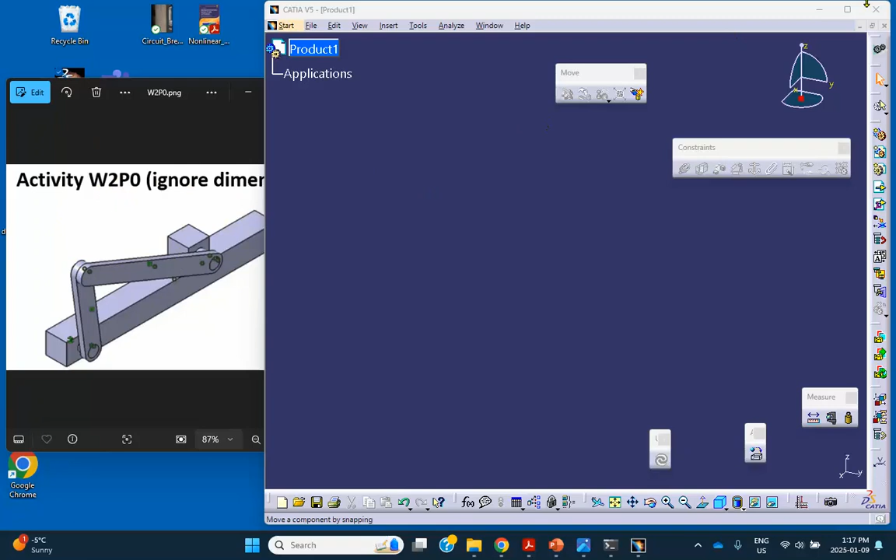I'm not going to show this thing again. Let's go back here and start making it. Now, immediately I save this thing: file, save management, save as - desktop, 2025, week 2, activities, activity W2P0. So everything is gonna go in there for this particular problem.

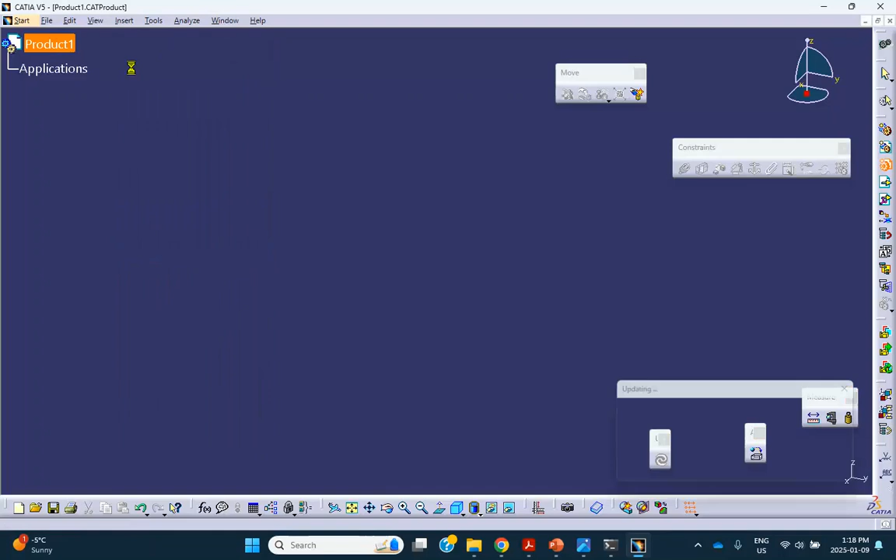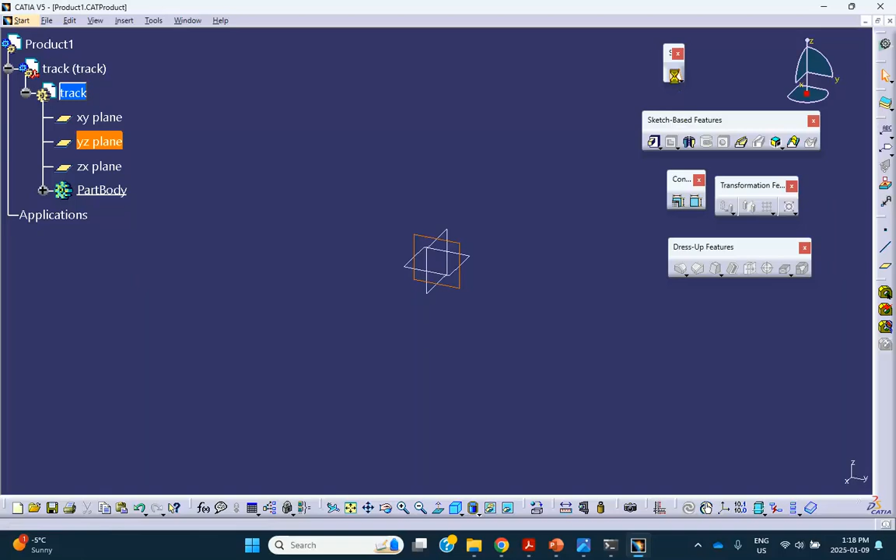Now let me do the track first. Insert new part, and I'm gonna call this thing track. Let's go make it - it's just a box basically. On that plane, I will sketch. Since dimensions are ignored, I might as well draw anything that I want, like this. Exit, and then pad it until I'm happy.

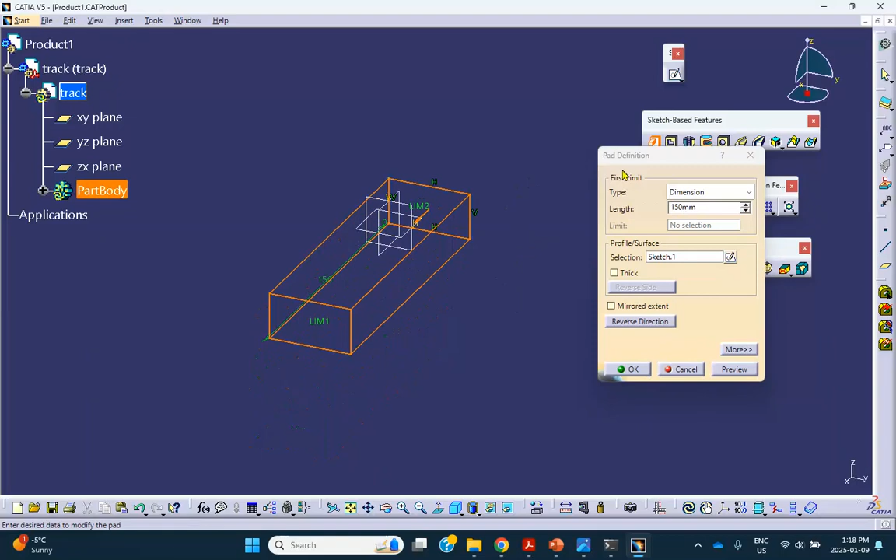Let me make this thing 150. See how it looks like. Maybe longer, 300. Preview. Yeah, sure, let me make it a little bit longer - 350.

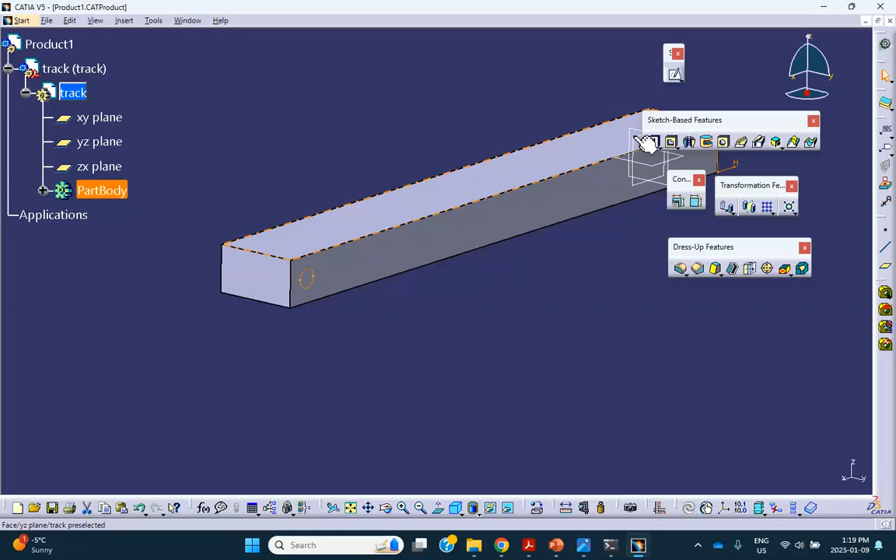There's the track, except that at this corner point I'm going to make a pin sticking out. On that plane I will sketch in a circle - this is where the pin of the connecting rod of the crank is going to go. Exit and then pad it, maybe 15. Yeah, that's good, I made it 15. Now I'll go all the way to the top.

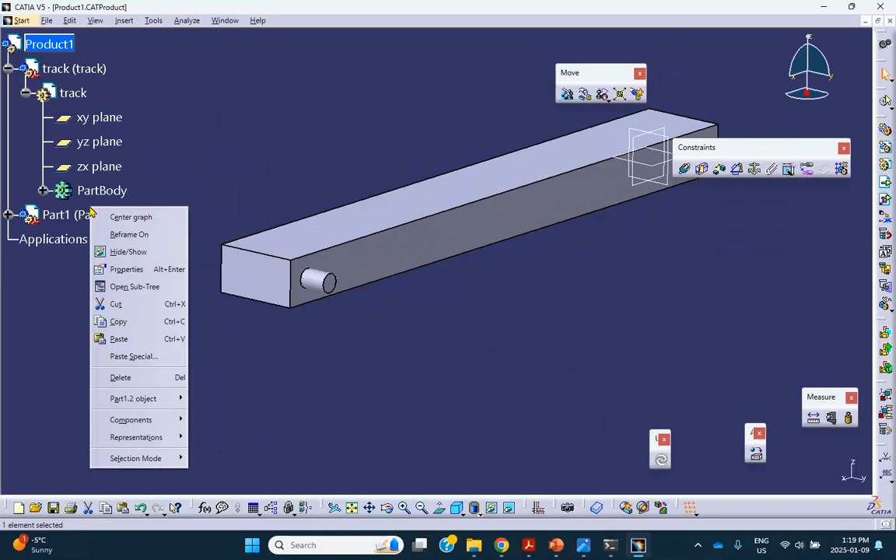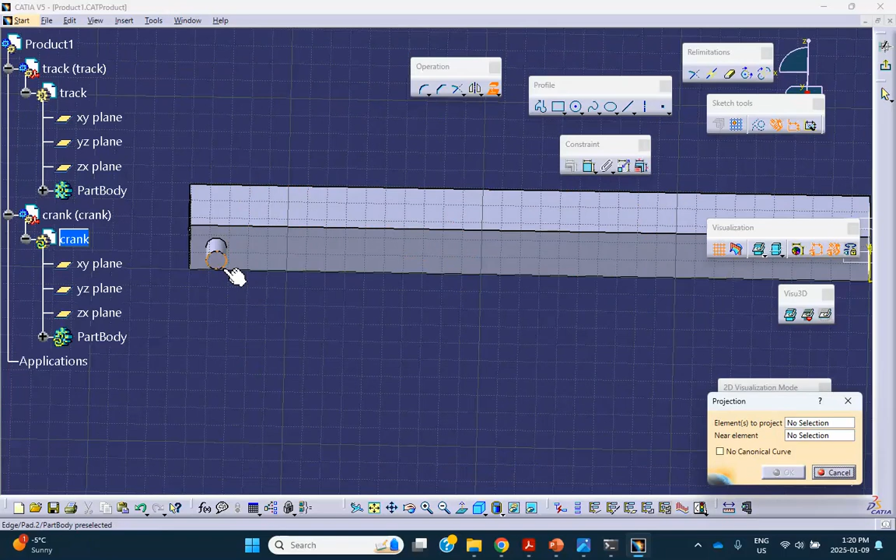Let's do the crank. Insert a new part - I'll say no, I'll make this thing crank. Let's make it. On that plane I will sketch - why don't I project that circle? There, it's projected, and here's the normal view.

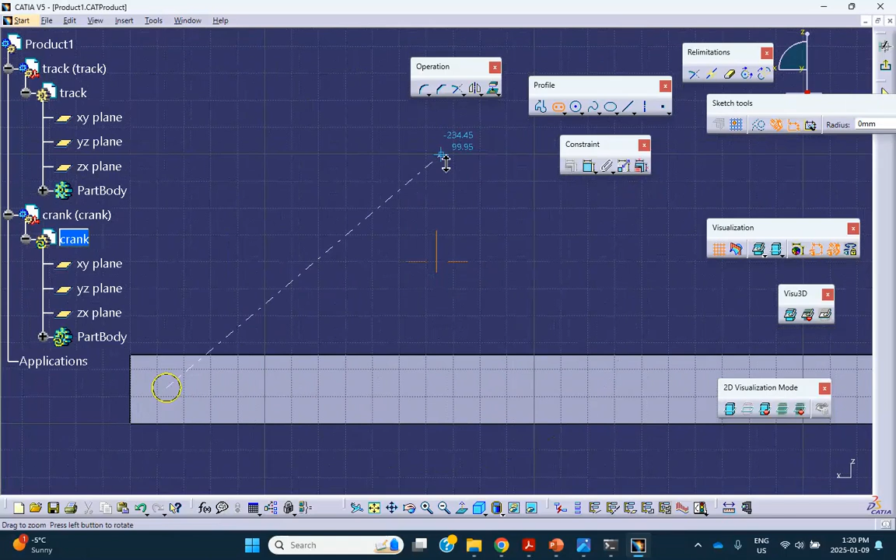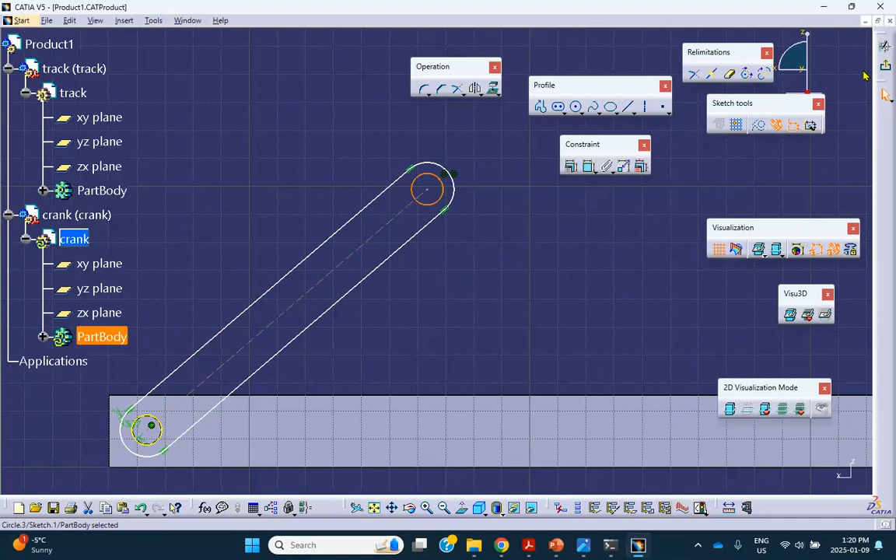Let's do an elongated hole. I like this because it makes my job really easy. Let me see, yeah, that's going to be my shaft. Okay, let's make another hole at this other end - circle at this end. Exit, and we can pad it. I'll make this thing 10. Yeah, good - so this is going to be the crank basically, all the way to the top.

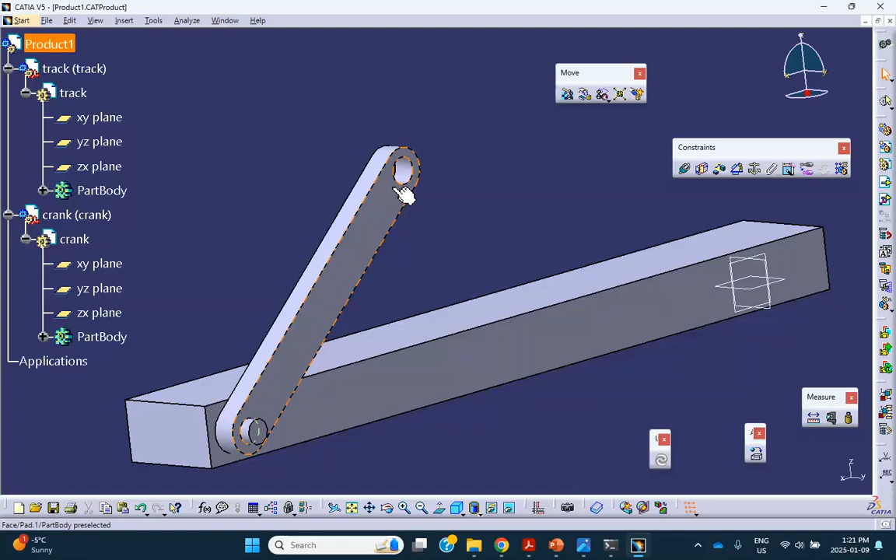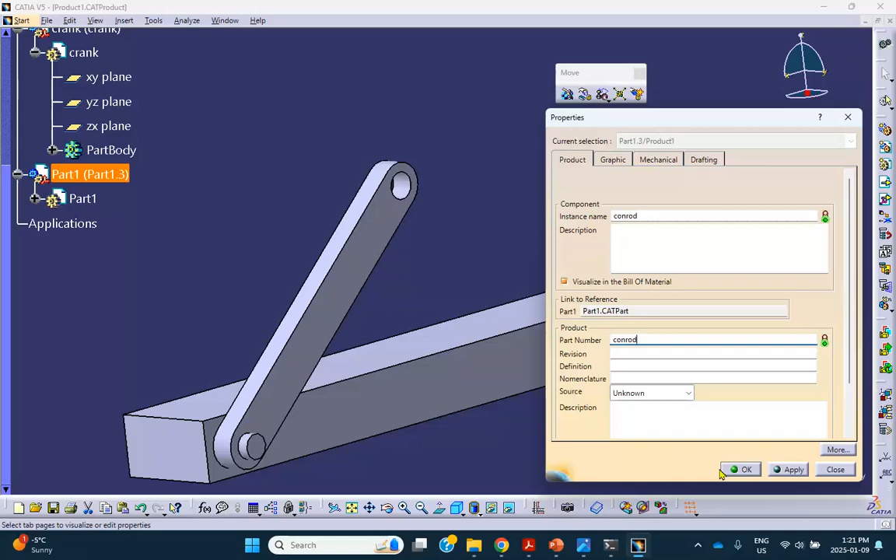Let's do the connecting rod. Insert new part - call it conrod. Let's go make it. On that plane I will sketch - why don't I project that circle?

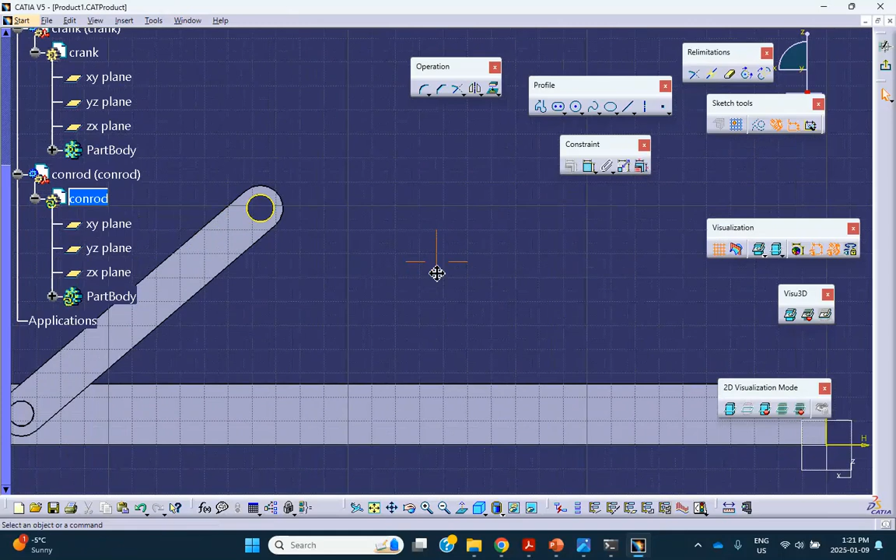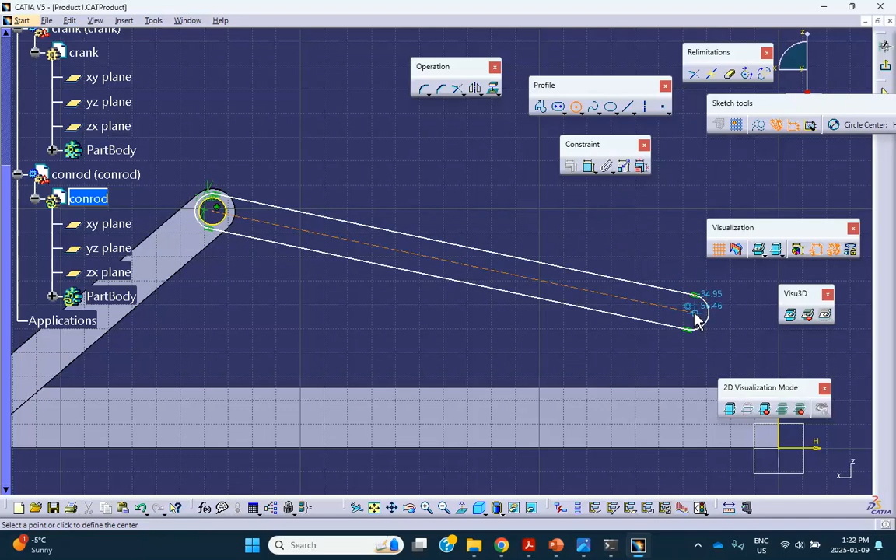Then I do the rest of the connecting rod. Once again I like this elongated hole, I put it there - this is going to be our connecting rod. Let me also make a circle at this end. Exit. If I pad it, there's going to be a hole here and a hole there.

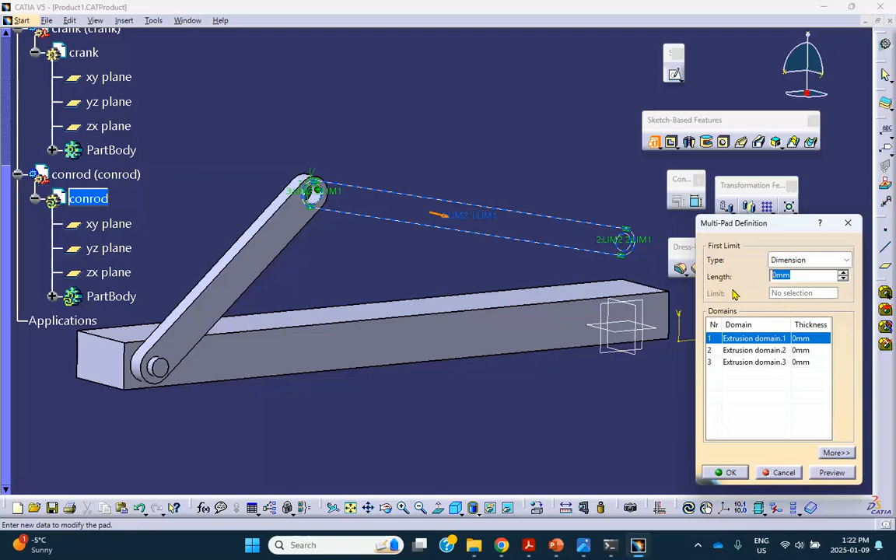Now I don't want a hole there - I want a pin sticking out. And here, no problem, a hole. That being the case, I'm going to do a multi-pad instead. So the first curve is the actual conrod, the periphery of the conrod. I'll make that thing 8 - see how it looks like? Maybe 6.

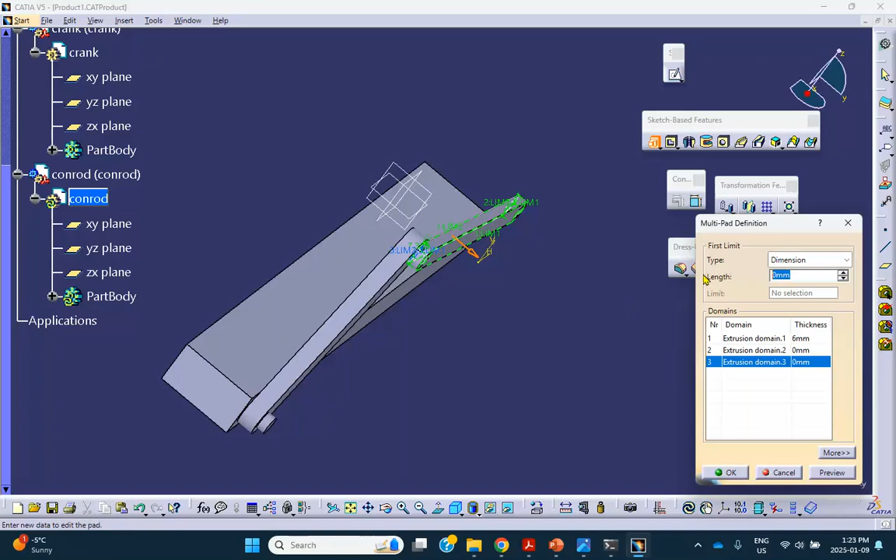Looks like that, are we happy? Sure, why not. This one is the thing on the other end that I want to be a hole, which is fine, and that is this end. I want maybe, I don't know, I'll make it - this was 15 and this was 8, so let's make it 6, let's make it 11. We can fix this thing later on if needed. What happened? I think I canceled it - let's try it again.

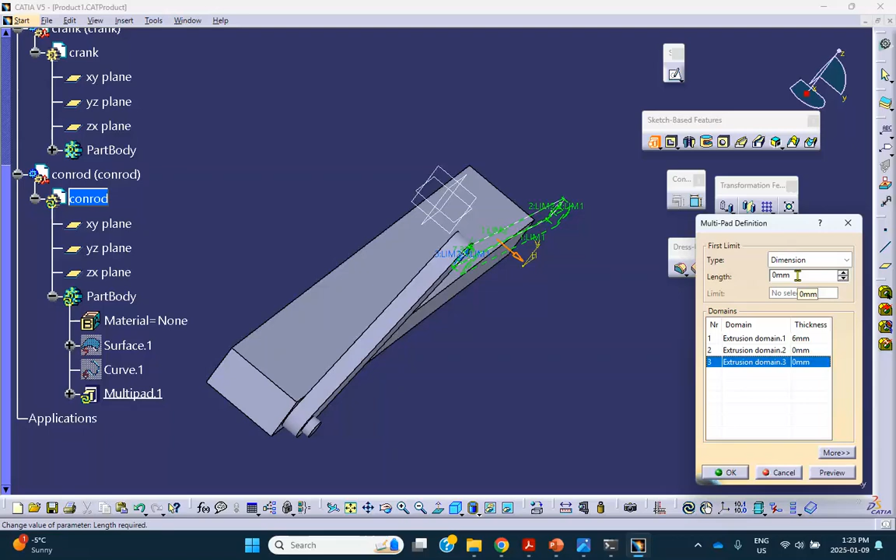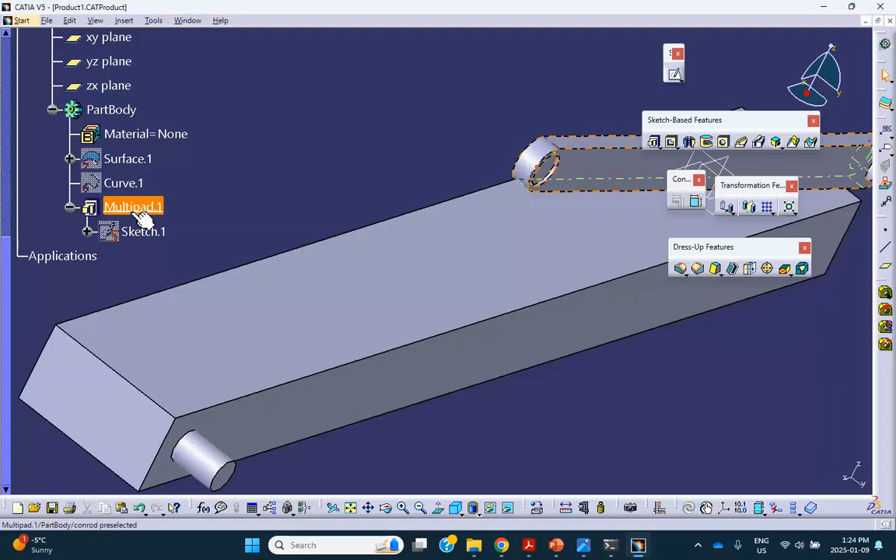Multipad - this, I made this thing 6, and I think I made this thing 5. Okay, there. Let me hide that to see what's going on. So that should not have been 6, should have been bigger than that - this was 6, right? So this one should have been 11 maybe. Yeah, that's better. Now the other fellow is in hiding - where's the other fellow? In hidden mode, right there. Let's bring it in the front.

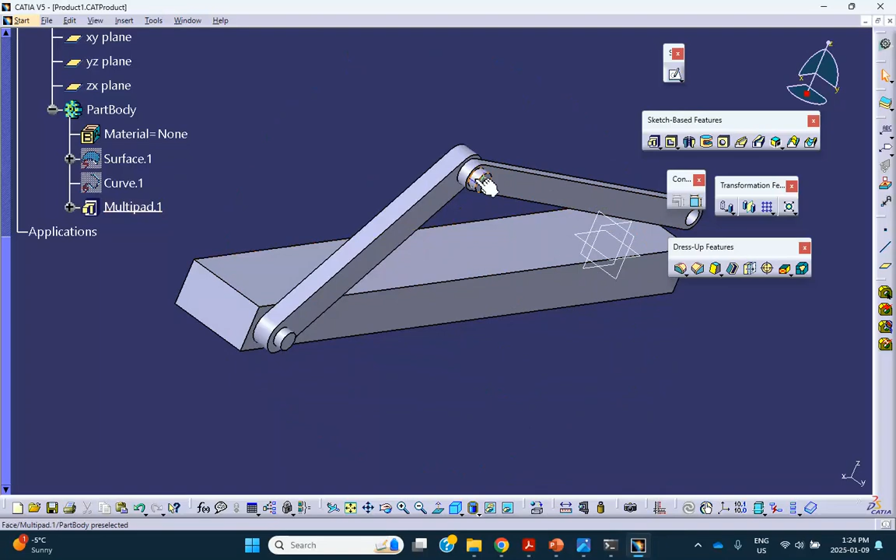Good. Now it is true I'm going to turn this thing around and put the pin in that hole. That's fine, but let's do the connecting rod and we'll worry about it later on. So not the connecting rod, the block or the piston - insert new part right there, and I'm going to call this thing block.

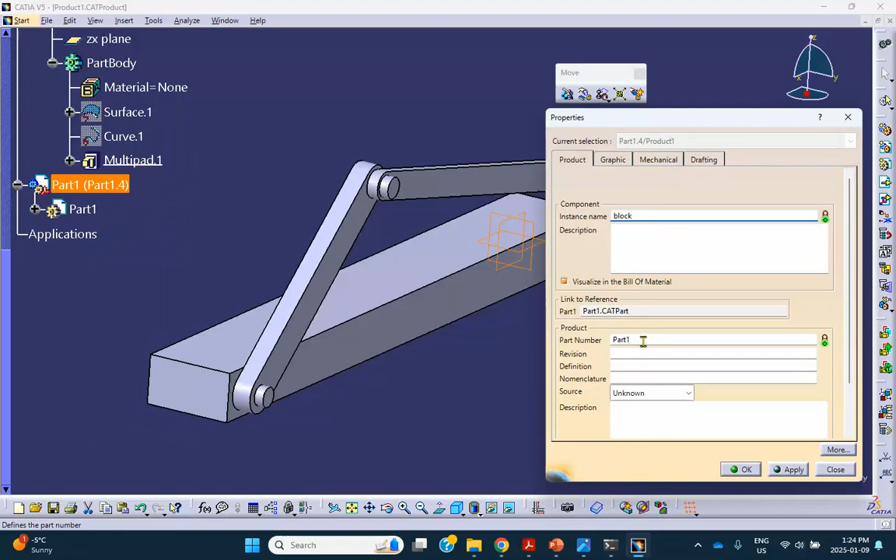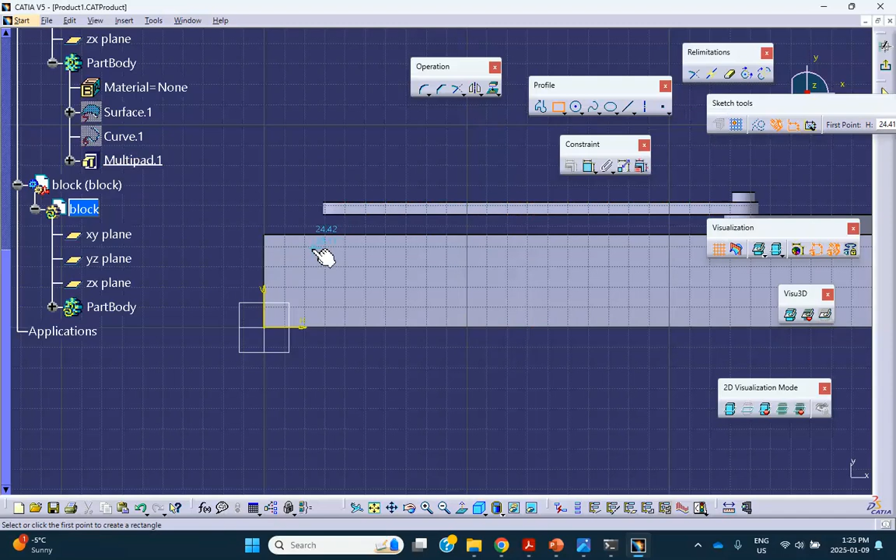Block and block. Let's make it. So on a convenient plane, on that top plane, I will draw a rectangle. See now, where's the rectangle? We'll draw a rectangle like that.

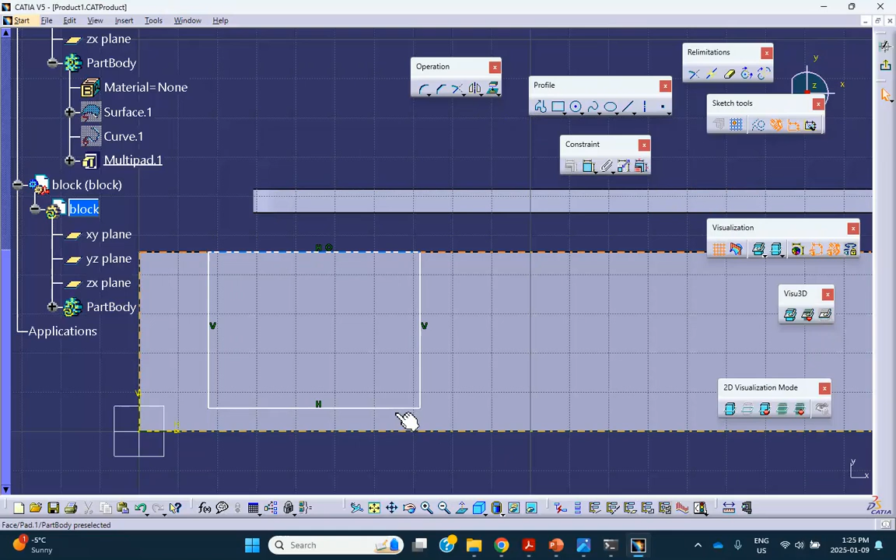Now why don't I make these coincident? This coincident control, that control, this line coincident with each other. Okay, same thing down here. That control this, also coincident. Just looks nicer, that's all.

Exit. Pad it. Maybe to 40. 50. Doesn't matter.

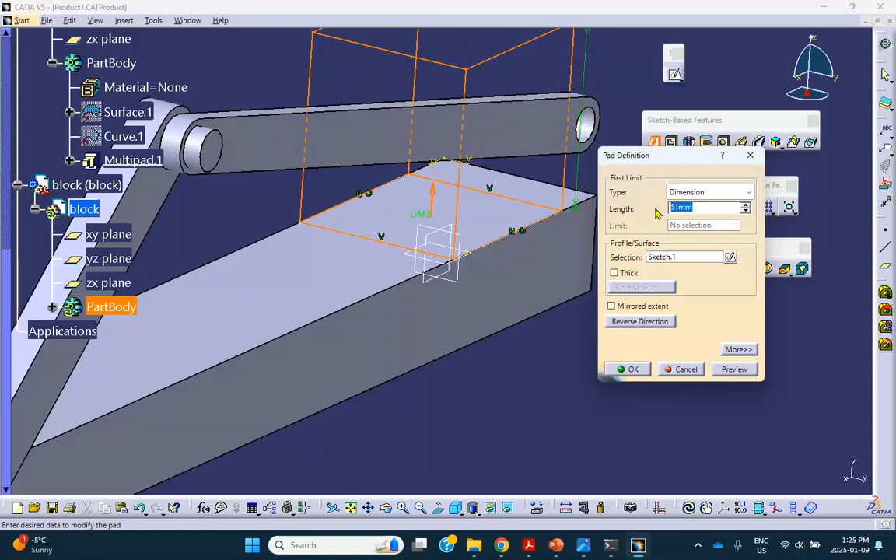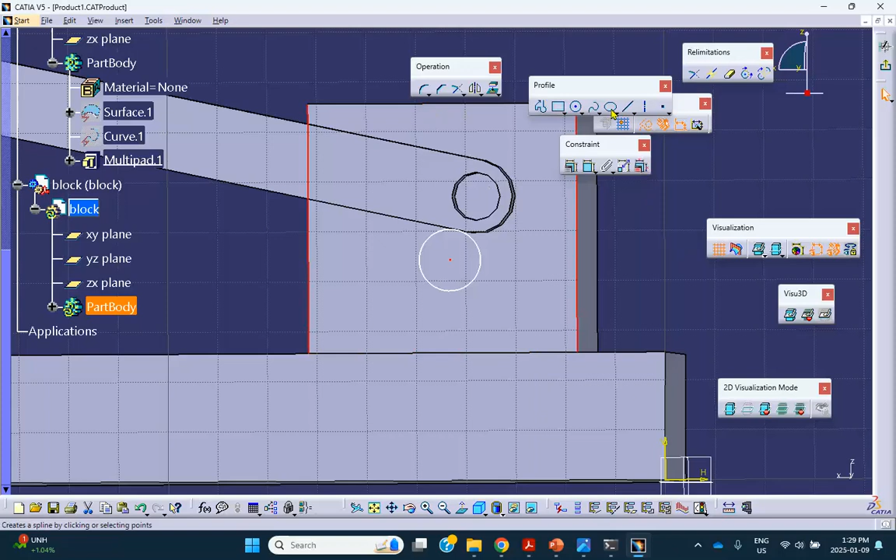Now it's on that face, I'm going to draw a circle and make sure the center of it is exactly halfway between the left and the right. So what do I mean by that? Left line, control right line, control the center of this. I'll make it equidistant. And the same thing with the top and the bottom. Top line, control, bottom line, control the center of the circle. Once again, equidistant.

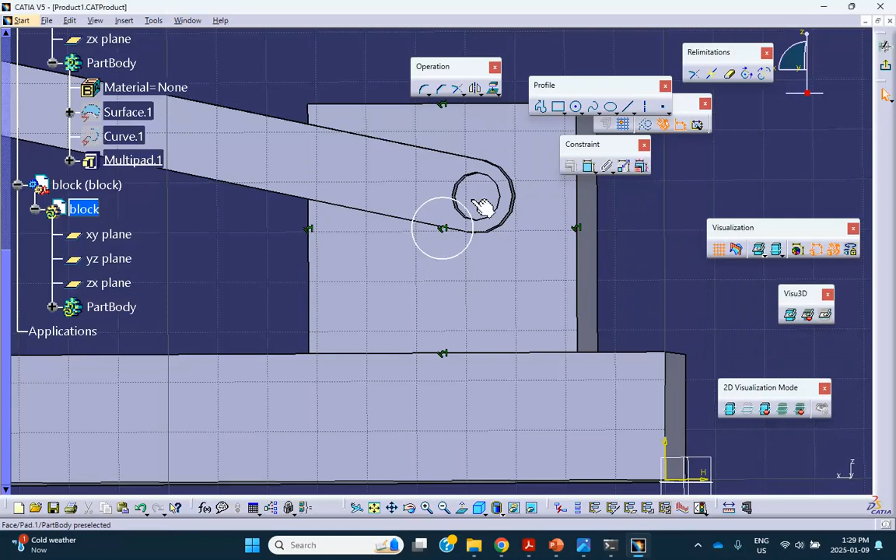Very good. All right, so I'll make this thing a little bit smaller than that because I want to put that pin inside of that hole. Exit, and then we pad it, maybe by 20. See how it looks like.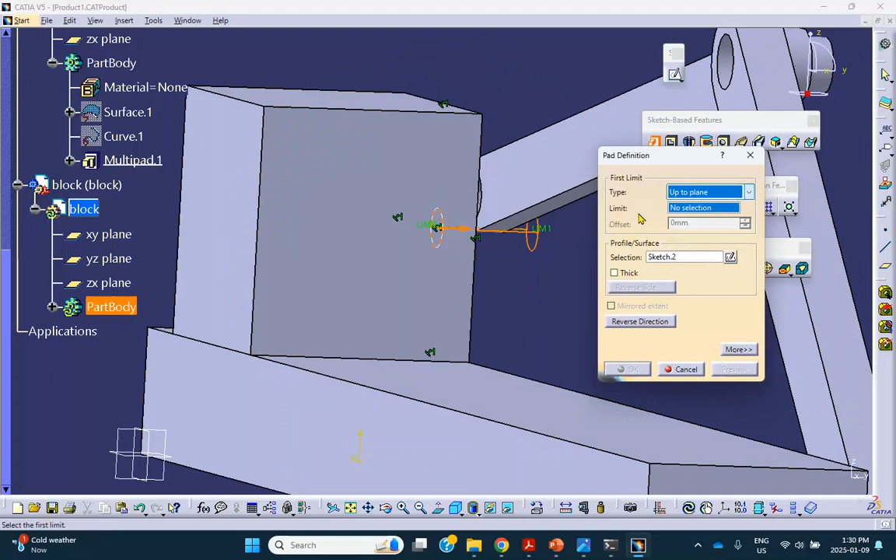Well, actually, what we can do, we can pad it up to not, let me do it up to that plane, up to this plane. Oh no, up to the other plane. Other select, also the selection. Let me undo this, let me cancel that.

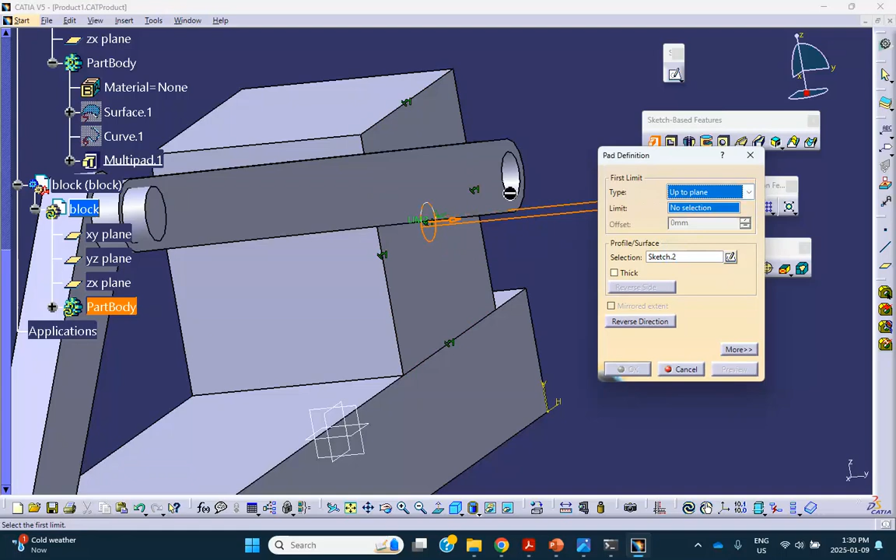Pad this circle up to a plane, up to this plane, and then we say okay. All right, so we're all set. We go all the way to the top, all the way to the top, and save it. The only thing is that this is not long enough, so let me actually go to this part when I padded it.

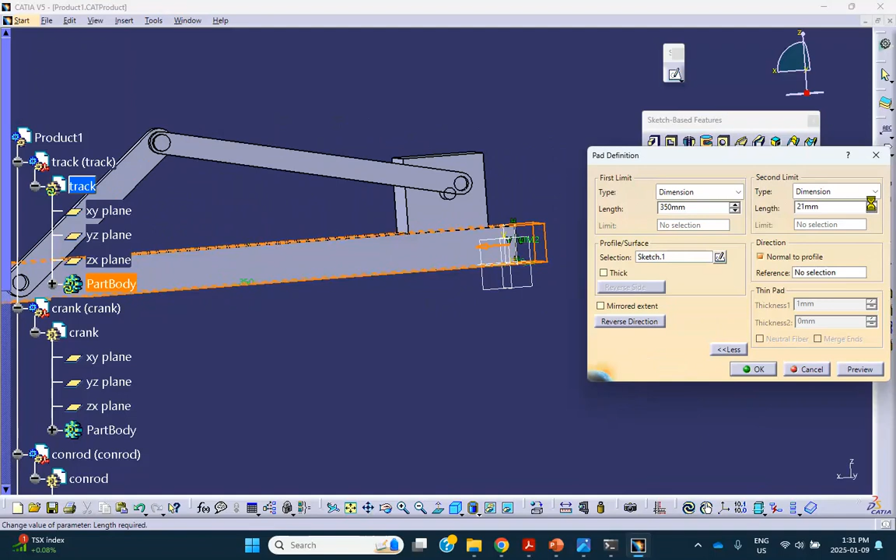And padded a little bit on this side, so more, let me see. Okay, that's better. Good. All right, all the way to the top, save everything, and let's go ahead and assemble.

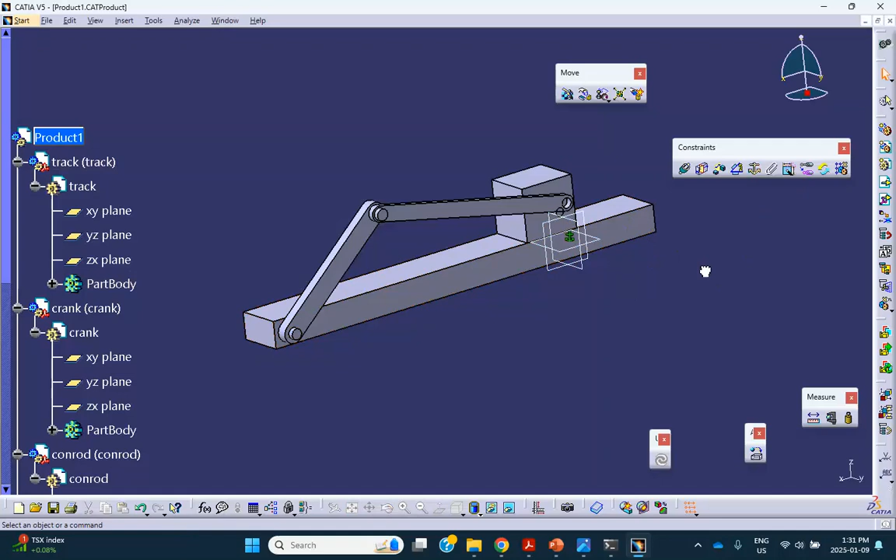First of all, the track doesn't move, so why don't I fix it? There, track is fixed. Now let's move things around so that we can see what's going on. So for example, something like this, like that, this, so you can see what's going on here. And let me also move this thing a little bit up.

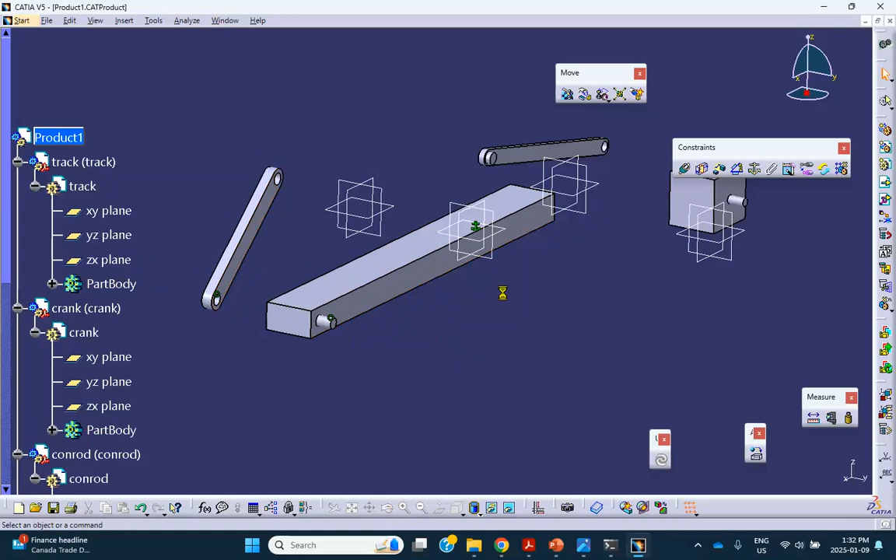All right, now we're going to do the assembly. Okay, first of all, we fix the track, it doesn't move. We're going to take this crank and put it in that, put the pin in that hole. So coincidence between this axis and that axis, and this plane and that plane, another one, of course, between this plane and that plane.

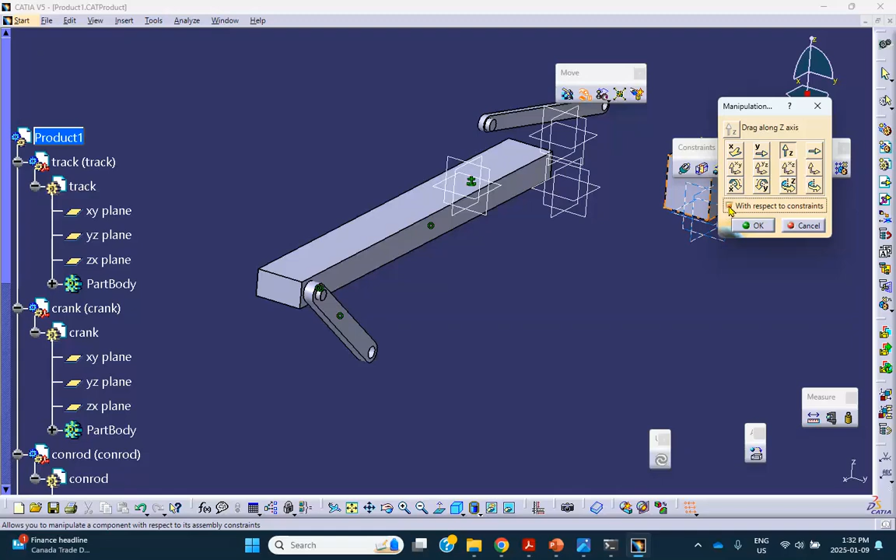And if you flip the arrow so it looks what you want, then that's fine. That's exactly what I want. Okay, now let me move this thing up a little bit. So I check this thing with respect to constraint, rotate about that, and move this so that it goes up. And when I'm done, I'm just let it go.

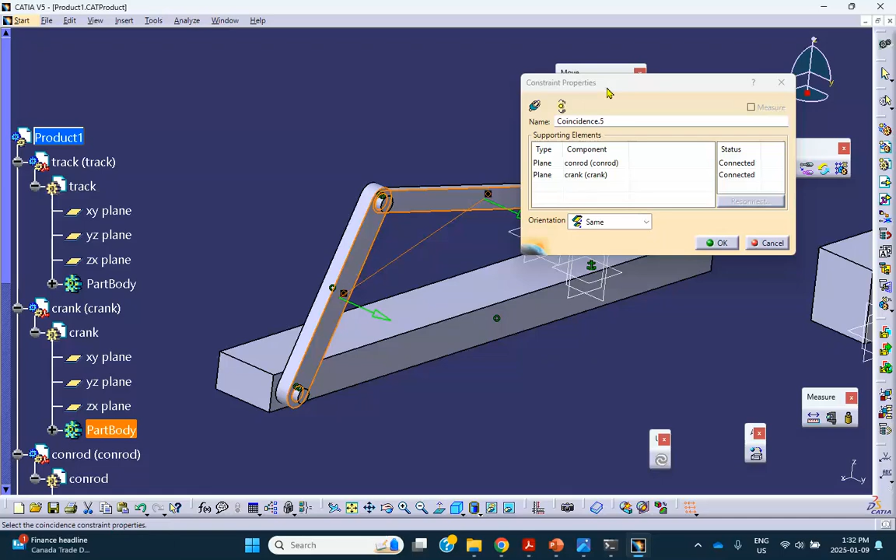Now this pin is going to go into that hole. So coincidence between this axis and that axis, and coincidence between this plane and that plane, and flip them. Let me see. Okay, that's better. You can see that, right? That pin ended up in that hole.

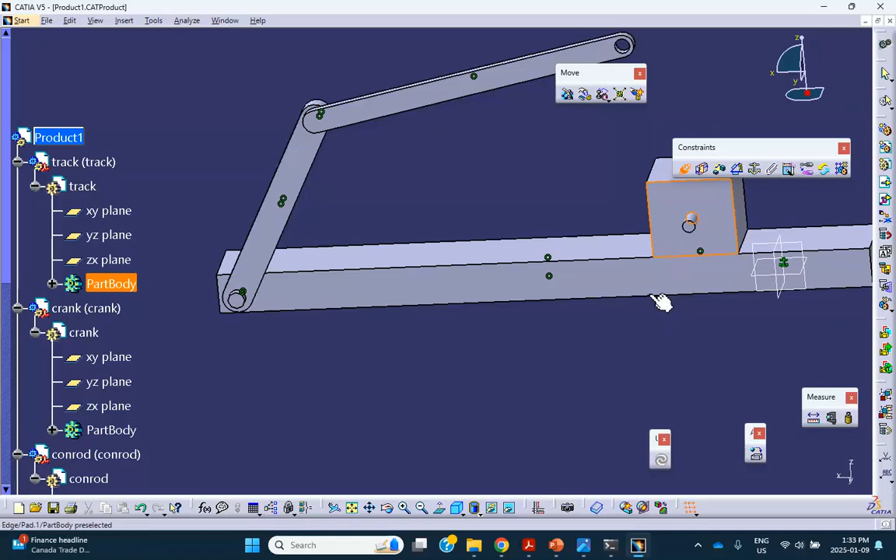Okay, now let's go and put the block on the surface. So we have coincidence between this line and that line, and coincidence between this plane and this plane. Fine. Now we're going to take that pin and put it inside of that hole. So coincidence between this fellow and that hole. There we are.

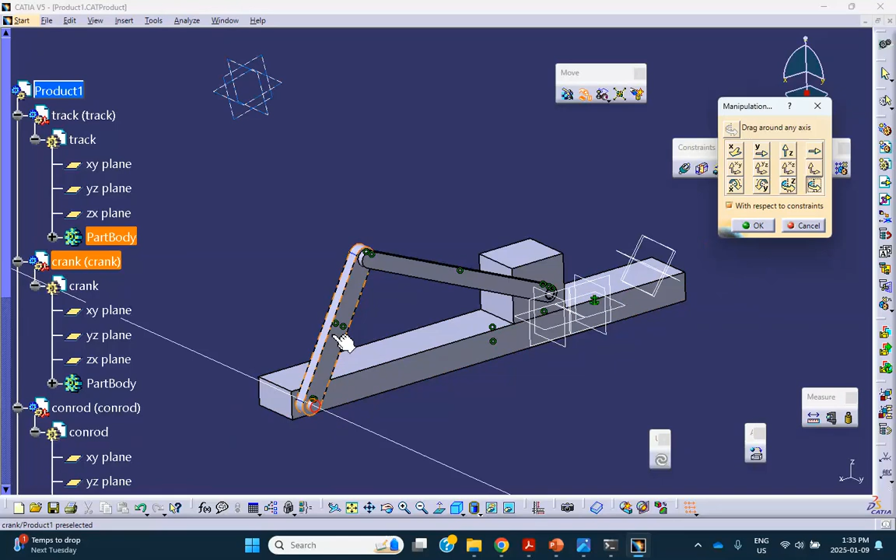How do we know if it's working fine? One way, at least to have some confidence, is you click on move and manipulate, make sure this checkbox is on, and then rotate about that axis. Look at what happened. That's the way it should be, right? This is a good indication that we are on the right track.

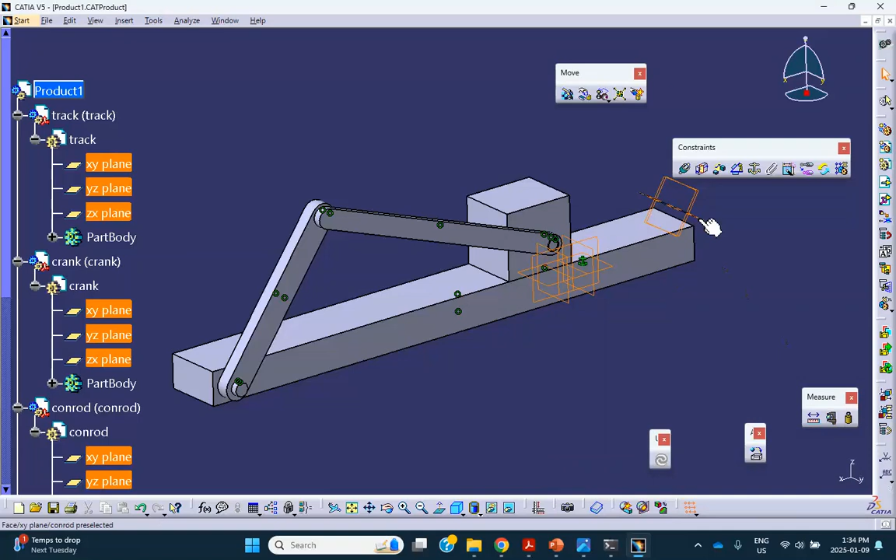Now, to convince you that actually that is the case, let me move everything apart. By the way, I don't like these planes, so you know how to get rid of it. Control F. Find all the planes, find and select, and then hide. Hide them all. Okay, good.

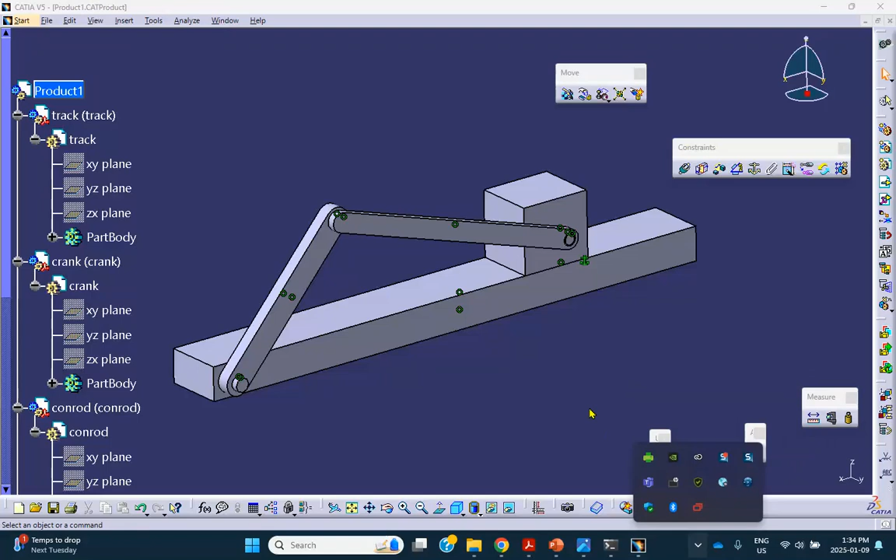Now let me move these things apart. So for example, I'll rotate that, rotate this fellow. And when I say update, they better go back to where they belong. There we are. Good sign. And that takes care of this tutorial. Later in the semester, starting next week, we're going to start putting physics.